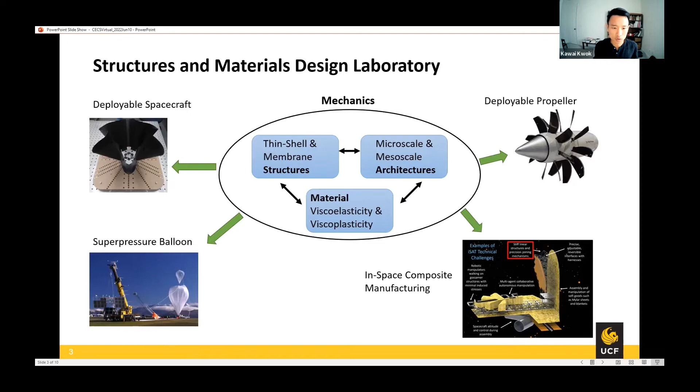So let's go back to today's topic, which is strain sensing. I want to talk about this topic because it comes up quite often when we try to design structures. What we don't have is knowledge of how the structure is performing when it's in operation. And it's very difficult to use traditional sensors on lightweight and flexible structures because they're not stretchable. Typically, they're not bendable.

Let's look at, for example, just common metallic sensors. They're not lightweight, and they typically don't have a very high strain limit. So they start to have a different sort of behavior as we go to more than a percent strain. The traditional ones are pretty good at long-term stability. So we're looking for some new solutions that are more appropriate for this type of application.

On the challenges, I'll just highlight one example that we work on, the super pressure balloon. A huge balloon is basically a plastic envelope, the same material you use in your plastic bags, polyethylene, but very thin. They have to put sensors on it because it's supposed to go for 3 months or more, 6 months, just by itself in the atmosphere.

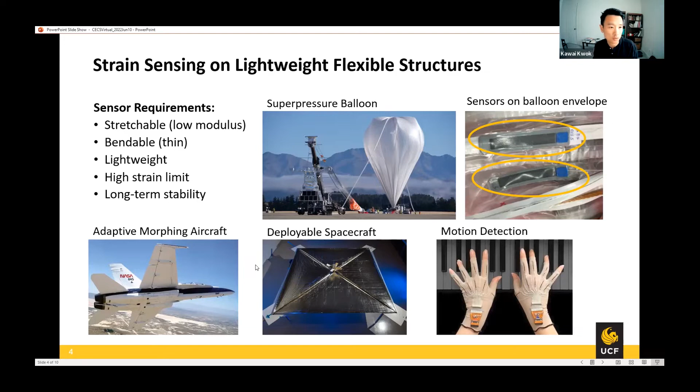Now, we're looking at carbon nanotube paper as the strain sensor because it has some nice characteristics: it's pretty stretchable when it's embedded in compliant polymer substrates. By itself it is pretty brittle, but if you embed it on a polymer substrate, it follows the property of that substrate. So it's nice because you can embed it on many different structures without changing the property of the structure, which is a big problem for lightweight and flexible structures. You put something stiff onto it, you're actually changing it, you're not measuring it.

And this paper has a piezoresistivity, which really is just a change in the electrical resistance as you apply mechanical strain. So it's shown here in the figure on the right, an experiment just showing the behavior. You have a typical sensor graph, the resistance change corresponding to some mechanical strain. This network of carbon nanotubes is a conductive material.

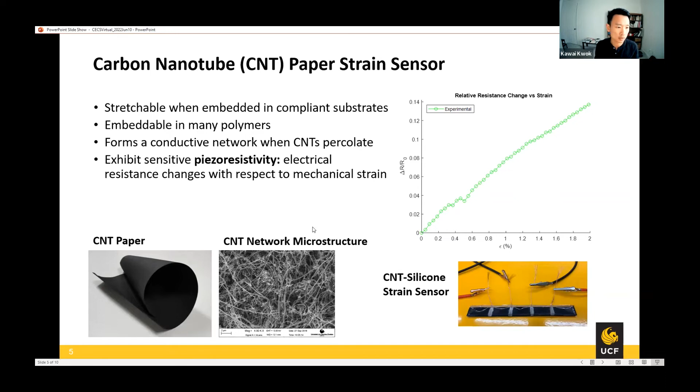So we want to understand really how to design these sensors and what this network structure is, because most of the time when we look at the literature, there are a lot of sensors based on carbon nanotubes, but the mechanism is actually not very clear, because there's no really predictive model that allows us to navigate the design space. So fundamentally, there is nanoscale tunneling resistance that is governing the property of the conduction.

So in the literature, most of the time, we look at the separation distance. If you have two CNTs that are in vicinity, they actually can conduct because the electrons tunnel through the space between them. So they're not touching, but they can conduct by this electron tunneling, and that behavior is fundamentally based on the distance. And that's all fine, and we have been modeling this with this equation down here. But a lot of the characteristics of the CNT are missing. This is just taking the distance between them.

So what we found out is that one has to really introduce the chirality of the CNTs to actually get that tunneling resistance correctly. So what we've introduced into this type of nanoscale model is the atomic registry. The CNTs have to align because of the chiral structure of the CNTs, and the probability of tunneling depends on whether they are actually aligned. So these are two pictures. You have two CNTs and the structure of the carbon atoms align here, and so it gets maximum tunneling conductivity. But on the other side, if they are not, then you get drastically reduced tunneling conductivity.

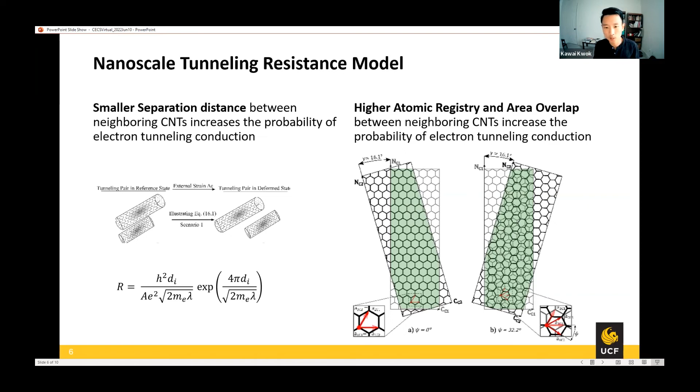And that is something that has been experimentally found out. There are nanoscale experiments and also quantum level simulations to prove that when you have two CNTs interacting, that angle matters a lot. And so this is what we've done. The blue graph is what we have introduced in this atomic registry, and the amount of area overlap between two CNTs. This is a comparison with an experimental study done in the literature, with the alignment angle, how these two CNTs are changing the alignment. So that was pretty promising for us, to be able to capture that.

There is another issue with this: the amount of area overlap is a geometric parameter. So it's not just the registry between CNTs, because the CNTs are finite sized, and the area overlap is also a finite parameter that has to be taken into account. And that is what we have shown here, that we can also capture that with our current model. I just want to highlight the yellow line down here, which is basically what the model in the literature has always done. There's no registry dependence in that model.

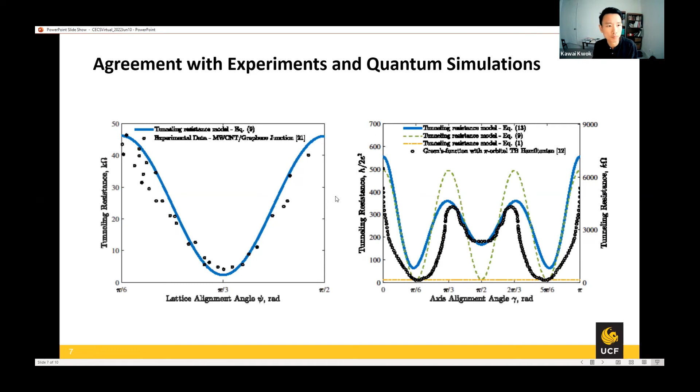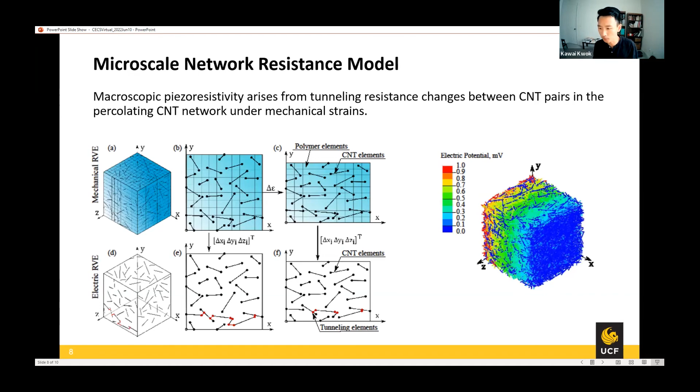Now, we want to look at real sensors, so that requires us to go one more scale up to the microscale. So that's what we look at in terms of the modeling perspective. We have a network of these CNTs distributed along the polymers, and we have developed an electromechanical model with this nanoscale tunneling resistance that we apply in a finite element simulation. At the nanoscale, we apply the atomic registry and resistance model that we developed. An interesting outcome is when we compare the computational model we have developed, this dual scale model with the nano tunneling resistance.

As you stretch the material, the network all changes. The kinematics and deformation change positions, the distances change, the alignment changes, and all that has to be taken into account. And we found that once you do that, the network becomes a lot more sensitive, because all these dependencies are not just on the distance, but on all the morphology of the network. And so we have a more accurate description of the actual network deformation.

And so this is what is shown here. The blue line is the new model that we proposed. The orange line is what the literature has always predicted. And the triangles are the data. And you see that the sensitivity is not correct if you don't put in those resistances at the nanoscale correctly.

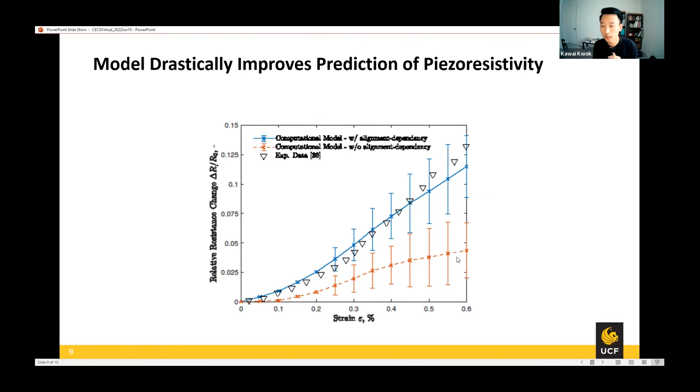So this is work that we want to put forward, because we have a good design framework for our nanotube paper. And we want to make use of the tunable electrical conductivity of the paper and look at a different problem, which is manufacturing composite structures. The general goal is to bring down the logistical footprint of large structures. Typically, they are made on Earth, and you need huge upfront costs to make them, which is not a viable route for a space future. So we are developing a CNT paper-based manufacturing route where we can combine electrical heating of the CNT paper with composite material feedstock, so we can bring large rolls of these materials and do the manufacturing in space.